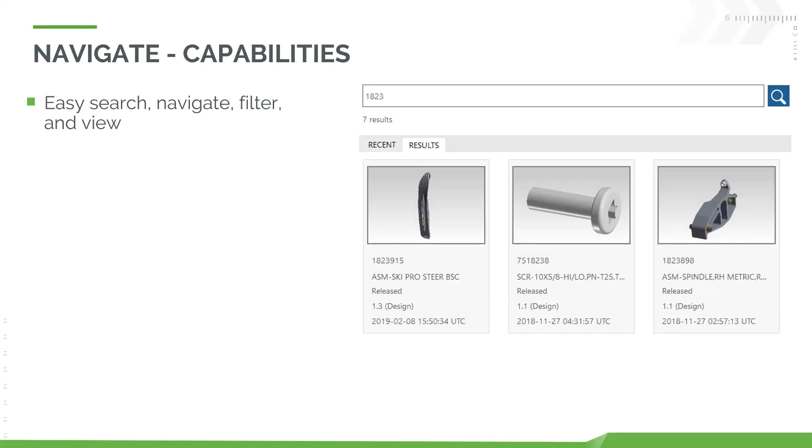So we're talking about what you're going to be doing with ThingWorx Navigate. The first thing is going in and easily searching for information. So this information is getting pulled directly from Windchill. For the users who come into ThingWorx Navigate, we want them to be viewing the same information, the same versions. It needs to be up to date. So all of that is going to apply. It just needs to be in a tool that's easier to use, and it needs to be in a modern and scalable interface, which is really what ThingWorx Navigate is.

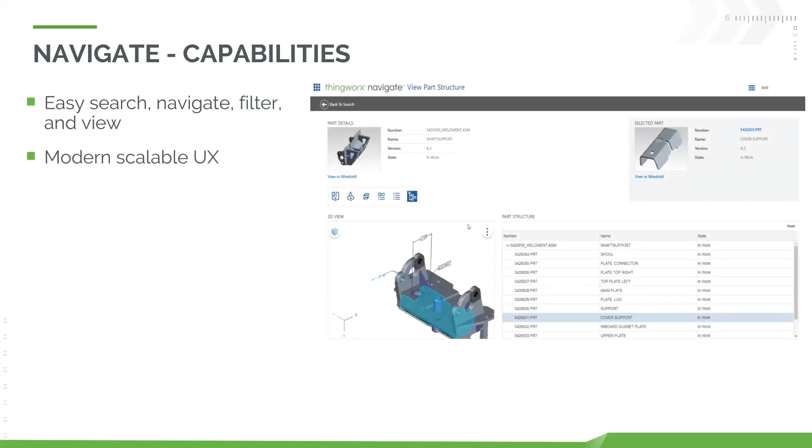You can use it on different devices. You have people using it on laptops, that's fine. Desktops, that's fine. Tablets, even cell phones, it'll work on. And what happens then is we've also built Navigate on the ThingWorx platform. So there's an interoperability layer there where you can actually use ThingWorx Composer to create dashboards and custom apps that you can actually access and view all from ThingWorx Navigate.

Right now, Navigate also provides you with connections to multiple systems. The obvious one is going to be Windchill, because that's where the majority of this data is going to be coming from. But it is ThingWorx, so we have the ability to connect to other ERP systems, or MES systems, or quality systems, or source code management systems—whatever the different systems that you're using are, we're going to be able to connect to them. Then you can pull that data into ThingWorx and display it maybe in the form of a dashboard that you build within ThingWorx itself. So this really means you're going to be able to use lots of data from different systems, funnel that information into ThingWorx Navigate, and actually make it the single one-stop shop for everybody to go in and view all the data that's relevant to them.

So with that being said, we will go ahead and jump into ThingWorx and we'll take a look at what this tool looks like.

Alright, so now this is, as you saw before on the PowerPoint, your ThingWorx Navigate home screen. So to put it simply, Navigate is your front end viewer for Windchill data. So whenever you log in, that's going to be what you're seeing. The apps that you're viewing there just depend on the access or the visibility that your role has. So someone in manufacturing probably won't have all the same options as maybe a manager who goes into here, or someone from planning who comes into here. But it's really, really easily configurable from user to user—it's literally checking and unchecking boxes.

So we're going to say here that I'm in manufacturing. I need to go in and look up an assembly. Now, the problem is in a lot of these systems, it's hard to search. If you have a 10, 12-digit part number, you got to know all the digits or else you're not finding anything. So just like in Windchill, we can do partial searches. If I'm someone from manufacturing, I can come in here, type in my number 1823, and then you see here, it takes me to the screen where I have my information pulled directly from Windchill.

So all of this is up to date. It's all the same stuff, it's just easier to look at. So it's broken down—I've got my visualization on the left, I have my part structure on the right, my bill of materials. And as I select on different components here, what you'll see is in the top right, I'm going to get a window that pops up that shows me details for the particular selection that I've made. And then on the visualization in the bottom left, you'll even see, just like when you're in Windchill, as you're selecting on the part structure, the corresponding part will highlight there on the opposite one. So if I select in the visualization, it highlights on the part structure. If I select on the part structure, it highlights on the visualization.

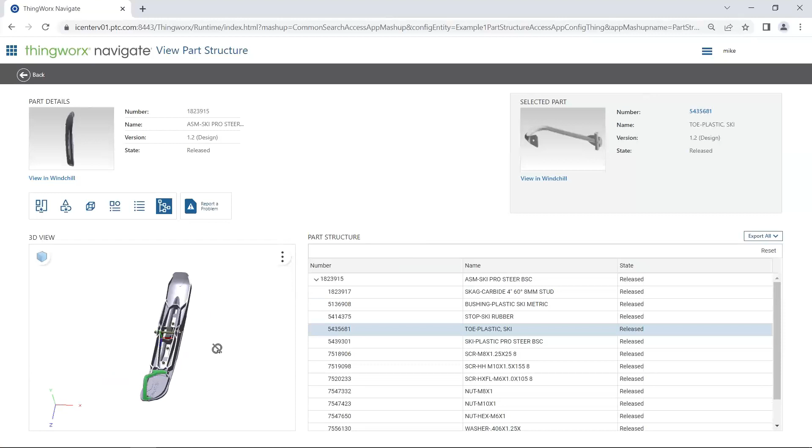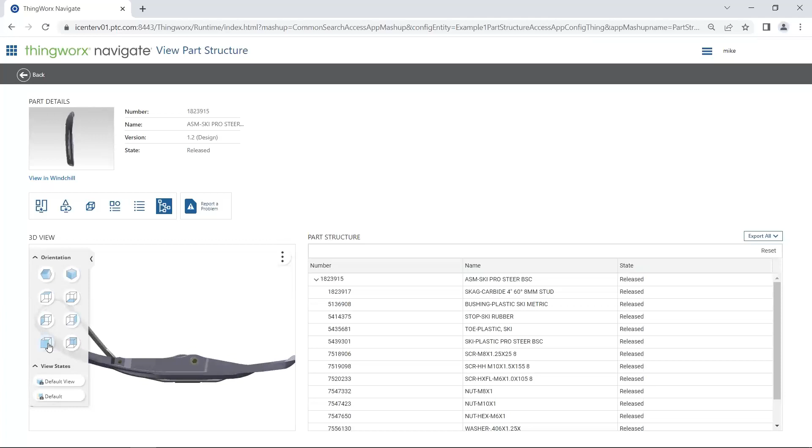We can also interact with this 3D view, the visualization, which is coming from Creo View. You can save different orientations, and you can even save different view states. So if I wanted to save something like a view with model-based definition on it with different tolerances, maybe for machinists working in here, I can create view states for that and save them as well.

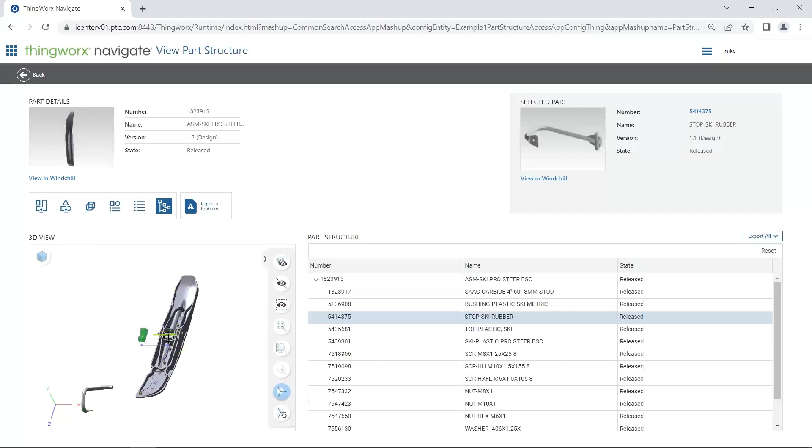These buttons on the right with the visualization really give me more understanding and let me interact with this model — selecting different components and moving them away. Maybe I have a piece that's like a shell taking up a lot of space and I want to see what's inside, so I can move components away, select on different things and hide them or isolate them. There's lots of different options for downstream users to understand what they're dealing with.

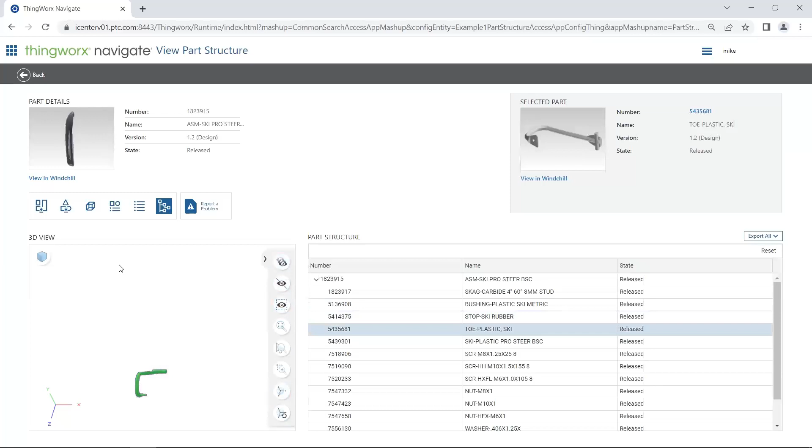Rather than going back to my home screen and clicking on the different tiles, it's actually something I can do from right here as well. So if I've looked at this part structure and the visualization, and I want a bit more information about this assembly, I can go to one of the other apps, the same ones that were on the home screen, just by clicking on the tiles here.

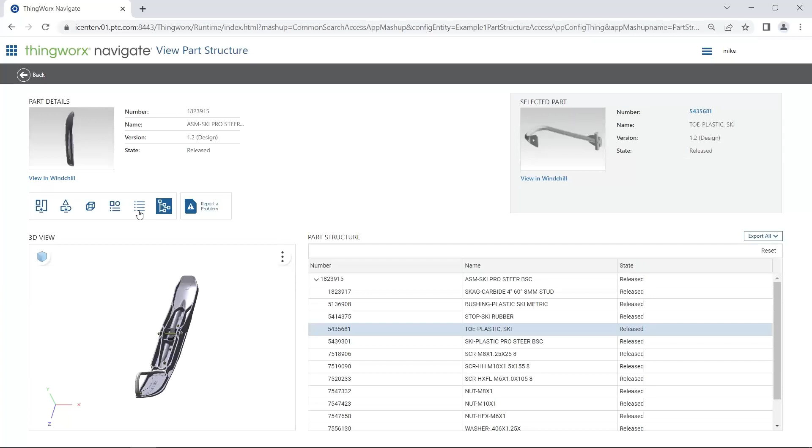You'll see this is more of an extensive bill of materials, and again it's configurable — pick and choose what information you want here. The same principles from the previous screen apply: you select something and get the details in the upper right. This screen also shows if there are any associated drawing files. So end users would have their bill of materials with all the information for this assembly, and within that assembly there are sub-assemblies, so you could link the drawing files here so they can print out all of it from one place.

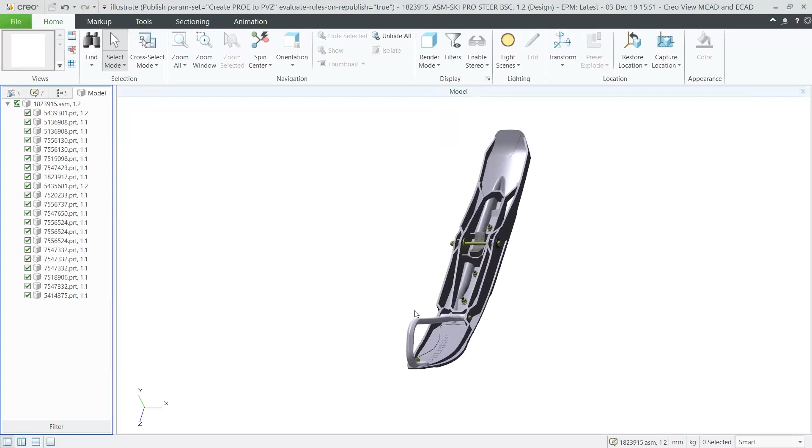There are some additional attributes — I have my view and measure 3D. If you have experience with Windchill, you probably know about Creo View. Creo View is something we can access from ThingWorx Navigate as well, and it works exactly the same.

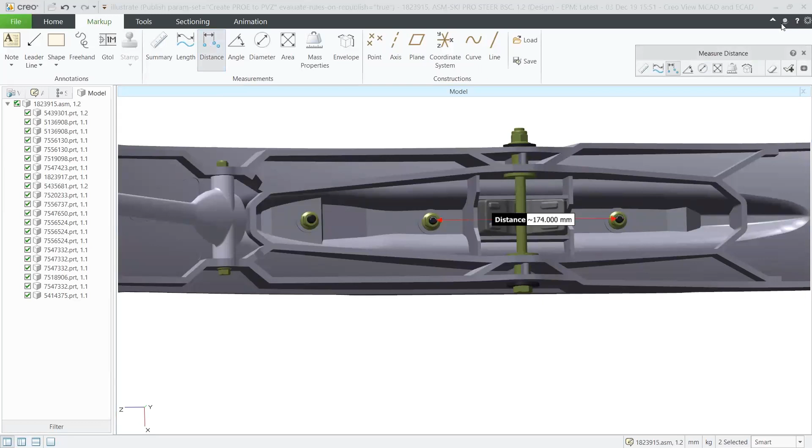If you have, say, a QA group that's going to use ThingWorx Navigate, they can come in here and add a comment or measurement, report a problem they found during inspection, and save it. That will launch some sort of workflow you've set up in Windchill. You can do that kind of thing here from Navigate using Creo View.

Right, so here we have our drawing, pretty straight to the point.

The last option within this manufacturing apps category is the bundle. What we can do is take all of your design files — if you use Windchill, these are the objects, the files inside of your WT part — and I can reference documents within that WT part. So I can open this up and download that bundle, which downloads as a zip file, and then I can share it off or save it to my computer.

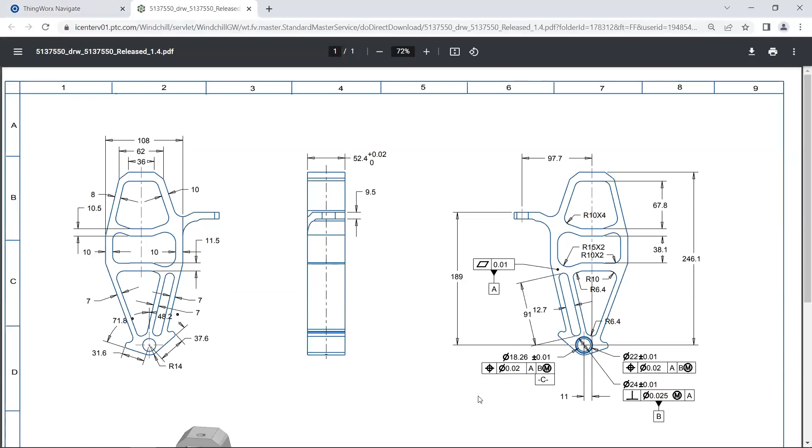Okay, again just another example of some information we might have in here. Our drawing with our PMI on it. So if you have machinists working in here, they can also use this to grab what they need as well.

And I mentioned before that you could save different view states with MBD. So this is what that would actually look like. They could actually see this stuff right in the context of that visualization, the 3D visualization.

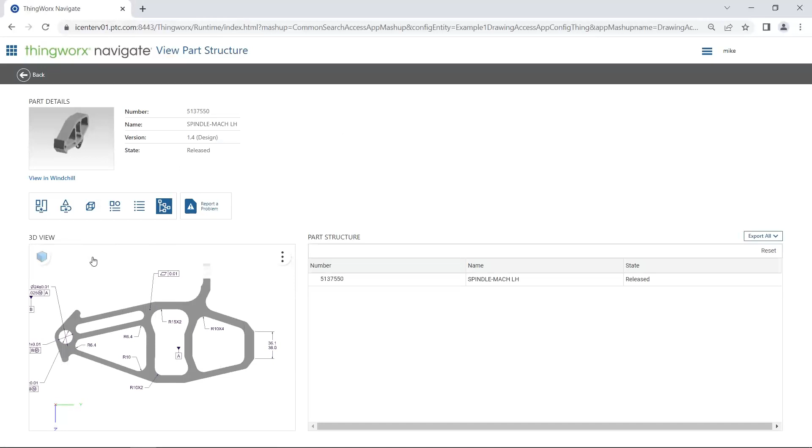Okay, so we're going to change roles now to someone from a different department that might use this app a little bit differently. Previously we were in manufacturing, now we're going to be someone from purchasing. So you can already tell just from the home screen I'm looking at different tiles. I don't have access to all of the applications that the manufacturer we were logged in as previously had access to. So all of this is going to be role-based.

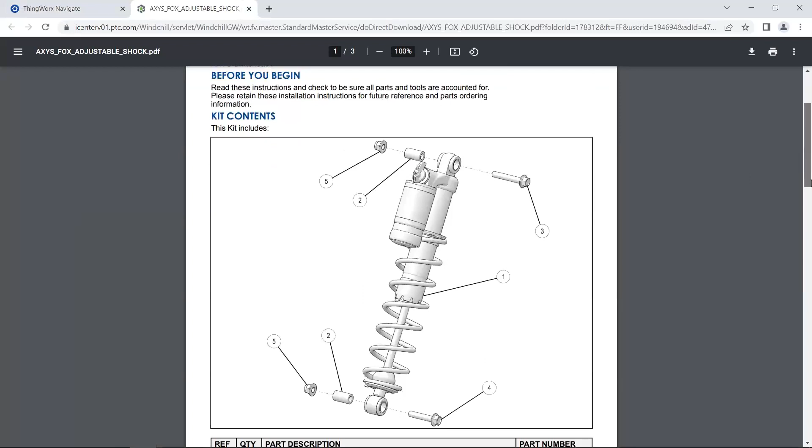Now let's say I want to come in and look for some documentation based on our shocks that we're getting from Fox. I want to see this is something that's coming from the supplier that I'm storing in here. Again, this originally is being managed in Windchill. It's uploaded in Windchill. You can see I even have a hyperlink to open it in Windchill. You can turn that on and off. But I am just using Navigate to easily access and view. That's the whole purpose of this.

All right, now this is way easier for someone, a downstream kind of casual user of Windchill, to come into Navigate and get what they need, as opposed to going into Windchill to do it.

Same sort of idea if I'm looking for maybe some safety documents. Now what you'll see with this one is it's not just individual documents we're looking at. We can have document structures built out. They're going to work the exact same way in Navigate as the actual manufacturable parts that we were looking at before did. So I have my structure, click on it, I can see the details in the upper right in the window that pops up. I can even open the actual document from there as well.

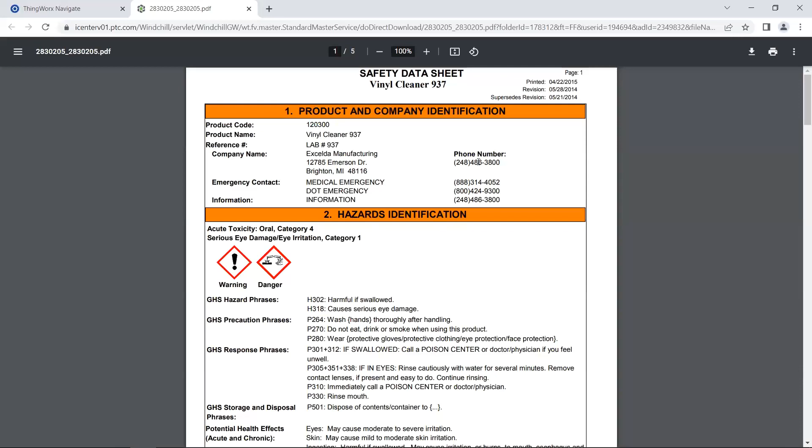So this is a tool that, honestly, you can get in it today and you can figure out how to use it in a few minutes. It doesn't really have much of a learning curve.

All the attributes, the filterable attributes and such that you have in Windchill will propagate over to here as well. And in this case, what I can even do is come into this and report some sort of issue, such as the example I mentioned before with someone from QA. And that's going to be part of a workflow so that whenever I report a problem, it will go to the appropriate user in Windchill, who will then review that problem and determine if a change needs to happen or not with it.

Last thing here, download drawing bundle. This is a nice little tool because it will just download a zip file of the parts within the assembly that I have searched. I don't have to go and search for them individually. It will just download them as a zip. I can send it to somebody. It includes the attribute information, it includes the drawing files, and it was just a click of a button. Right, there's all my PDFs.

Lastly here, I want to log in as one more user. So this one is a product manager. And sometimes there's a misconception where this app is only really used by end users, manufacturers, assemblers, people like that. And it is great for them, it's amazing for them. But it's not just limited to those types of users.

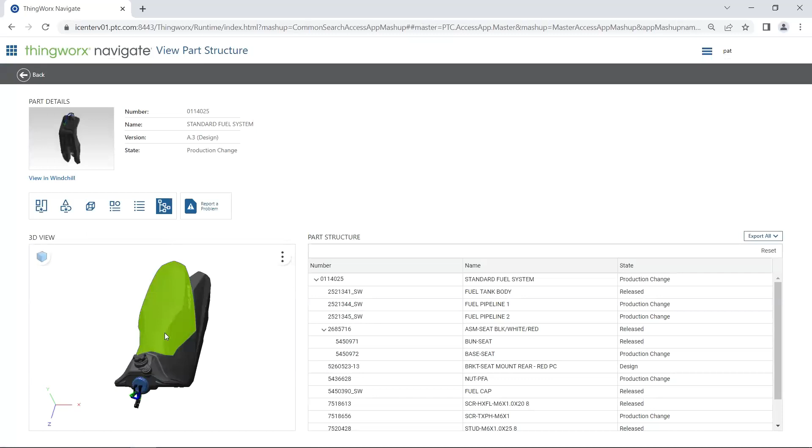There's my list of affected items. If you've done changes traditionally in Windchill, you know these different categories already - full affected items list here. As a manager, I can get an understanding of what all is going to be affected by this change without having to go into Windchill. Maybe there's a specific part I'm concerned about - I can go into it and look at it without even doing another search, just clicking on the hyperlinks that were in the change request.

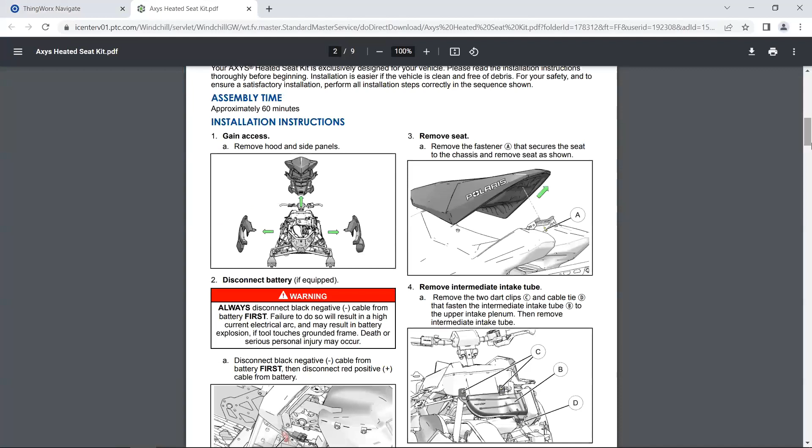Then I can check out this seat and say, all right, everything looks good, I'm going to go back - I reviewed this, we're in good shape. Maybe now that the design looks good, I want to look at a certain attachment, the PDF that's directly from Polaris in this case. Review that, get some insight, and once I'm good, I can give feedback - either approve it or reject it. You can also require an e-signature there to show it's been signed off on.

In this case, we'll open this up - we reviewed all the information, and you can see there's my e-signature that's required. So I will approve this and type in my username and password to complete the signature. And there's my e-signature - my task has been completed, I signed off on it. Now you can see in the status column it's been completed, and since this is part of that Windchill workflow, it would then kick off to whoever's next in line, whatever their role is.

The last thing I want to show here is if I go into tasks - once again, this is more of an admin type of thing. All of the information you're looking at in Navigate is configurable - the different attributes, the different columns of information, a lot of it's just drag and drop. You can really configure anything - what apps people are using, who has access to what, what columns they see on the parts list, even between user and user. So it's a very easily configurable tool.

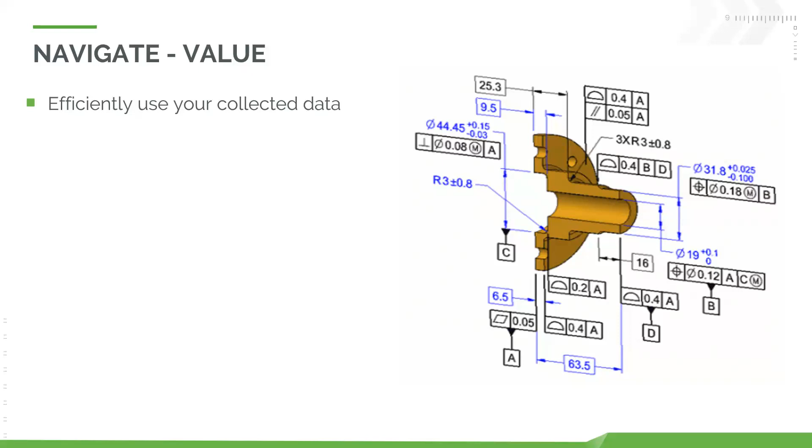Navigate gives you a very user-friendly interface for inexperienced, infrequent users to jump in and find what they're looking for. And because it's so easy to deploy and use, you're getting a return on your investment very fast, and the value will be recognized almost immediately.

You're involving all the stakeholders. Product development needs to involve everybody earlier and more often, and Navigate allows you to do that. You can collaborate with more employees, get more insight, and that's going to lead to a better product. And then finally, put it all together, you're going to reduce errors and cost. More people can get the information they need, more people have insight. You have a connection between downstream users and the teams that are actually designing these different products.

So that's what I had planned to go through for this demonstration of ThingWorx Navigate. Cool, nicely done, very nicely done. So we have a few questions.

First question: does Creo View need to be installed on the local computer? And if so, when do we think Navigate will support a web-only client to prevent the distribution and installation of the CV client for users? I believe that depends on the package. I actually think Creo View Express or Lite does not need to be installed, which is the most basic form of Creo View. Correct, you're not getting any extra tools or features. Correct, Creo View Express you can just download on your phone and use it.